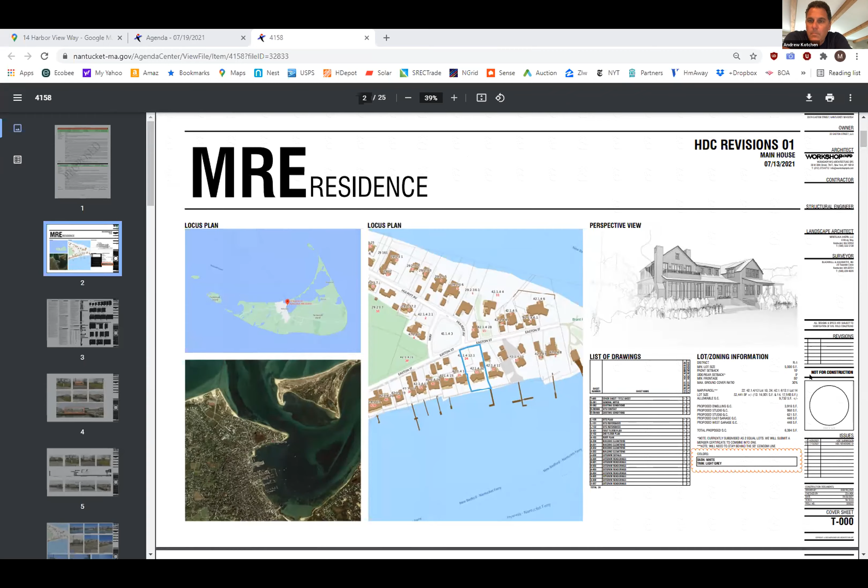So next on the agenda is 22-24 Easton Street, main house. Oh, I've got to bring that up. I'll share my screen. Mickey, I want to make sure you have the most up to date version, because it's been quite a while since this has been heard. Yes, this looks right. Yeah, it's definitely different than the last time we saw it. It's much different. Yes. Yep.

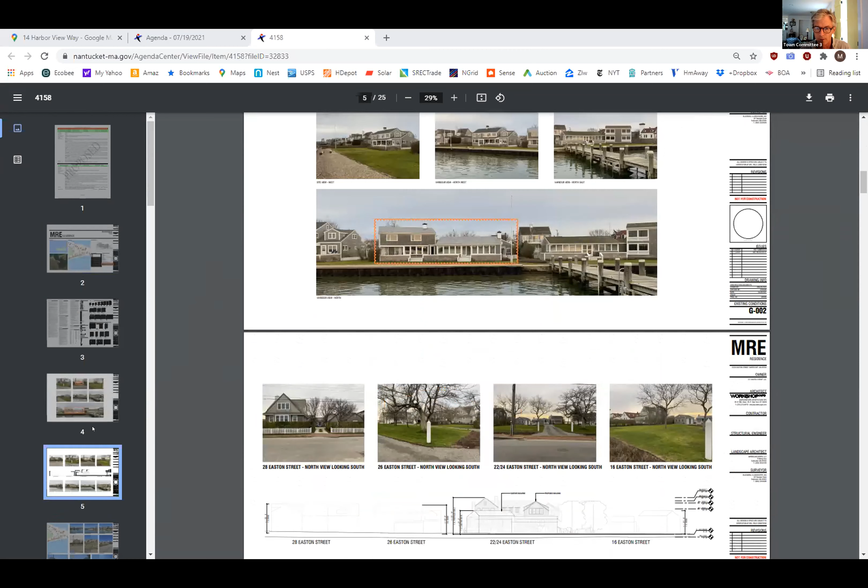All right, I'm going to go down to... I don't know how HSAB works, whether or not you want me to say anything, or do I just sit here and listen? Well, it's pretty informal, so if you have something you want to introduce or talk about, please go ahead. Okay, great, I'll be quick, I won't take up too much time.

Last time, HSAB had quite a few comments on this, and so did the HDC. I tried to take all the comments to heart. We've made pretty extensive revisions, starting with the site plan. Whereas before I had both garage structures butted right up against Easton Street, it was suggested that I stagger those to loosen up the street edge rather than maintain a full vertical wall, even though they are one story and at grade, since they don't need to be raised within the floodplain.

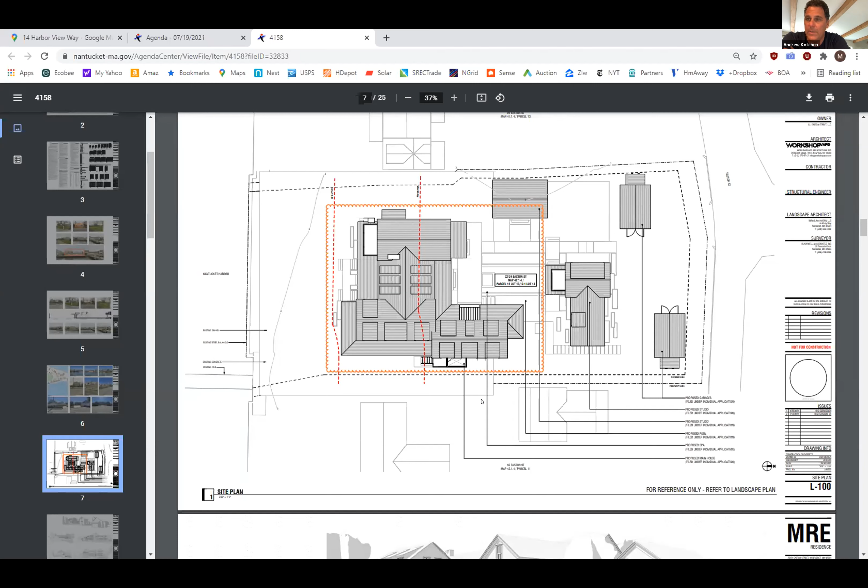Additionally, HDC and HSAB both really encouraged and suggested that the front door be visible from the street. So now the guest house structure located on the north side of the site has been slid down to the east, so that the curb cut will allow you to see the front door of the house from Easton Street. You'll see in the back of this packet quite a few renderings that I included.

Additionally, I broke what was a U-shaped structure before and made it more of an L-shaped structure, and now the studio is located on the western side of the site, disengaged from the main house. The HDC suggested I actually, believe it or not, add more glass and make the main mass of the house taller. So that's what I did on the south side of the project.

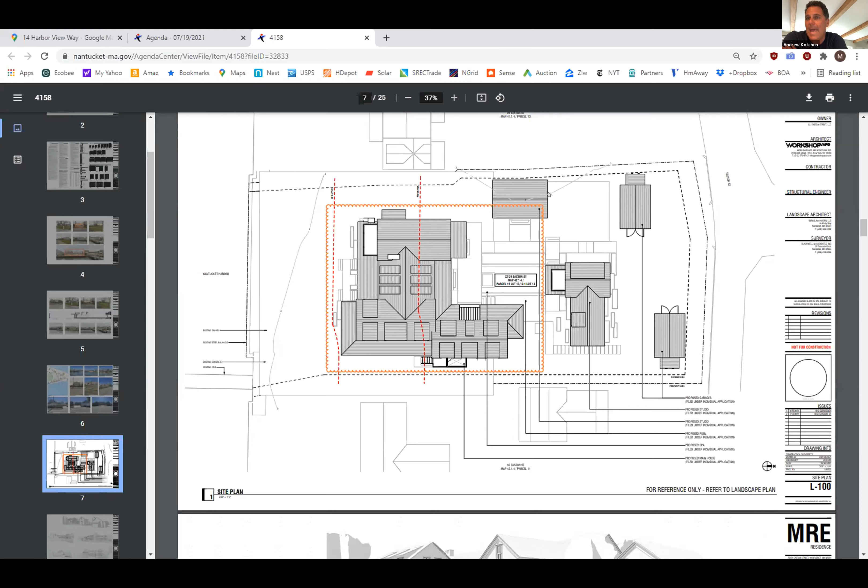I've adjusted a bunch of the dormers, added quite a few covered porches based on looking at some historical precedent from the area, and tried to create a home that is more interesting than a lot of the existing homes along Easton Street from the water.

I've spent a bit of time studying them, and I feel like this house has some nice additive massing components to it. It is varied. I also completely changed the trim detailing on it.

It was suggested that the house before was too plain. I've included some images in the back of this presentation of the trim structure where the larger overhangs, a bit more of almost a crown molding piece on the eaves and fascias that wrap around, a little more ornate on the head casings of the windows.

And I feel like it's a better house now than it was before. So it is now breaking the 30-foot ridge height plane.

So I will need to get that variance within the floodplain. But again, I was encouraged to do that to create a house that had a little more of a vertical presence on the main mass. But the secondary mass and the middle mass are below the 30 feet. So I'll leave it at that.

Oh, and I had before had black sash windows, and HDC said no way to that. So now it is, I believe it's gray. They are gray sash windows with a lighter gray trim.

All right, thanks, Andrew. I'm gonna, I've looked at this ahead of time and I've got some thoughts. And Andrew, I'm gonna apologize ahead of time. You're not gonna like this, but it's fine. Here we go.

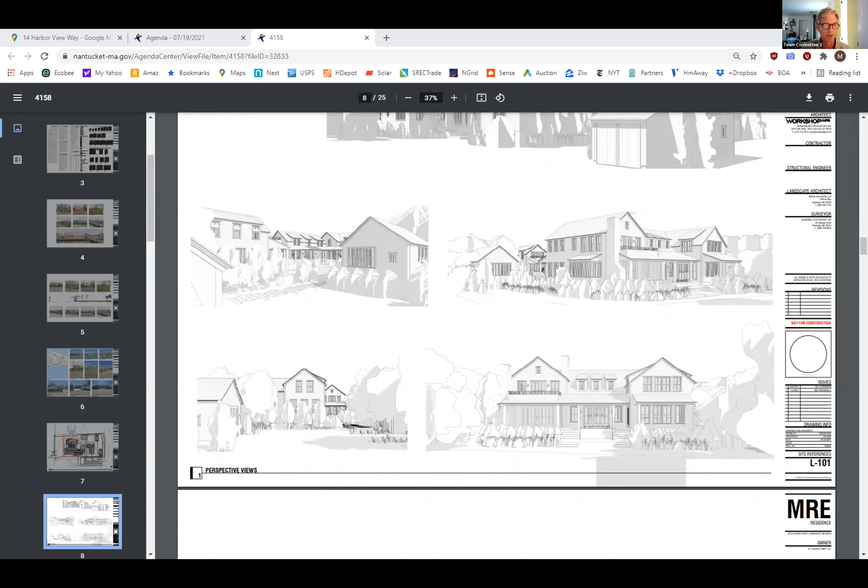Some of the details, the doors are oversized at 7 feet 6 inches tall, detracting from the scale of the building. And the four light design is confusing next to the 2/2 windows. Doors should look like doors and be of a more traditional size and pane proportions, such as 7 feet high with 12 or 15 lights.

I'm going to scroll down to some elevations. Okay, can you all see those elevations that we're looking at now? Yes, thanks, Mickey. Got it.

Okay, so the very visible chimney mass, and I'm referring to the one off of the, well, I guess it's on the west of the building, is in an incredibly awkward location. The east elevation of stepped parallel boxes reads as a monotonous 2-story wall with little character. The independent ridge of the stepped portion is too disconnected to count as additive massing and feels like its own building.

The horizontal boards on the outdoor shower and porch skirt are not traditional. They should be vertical or paneled lattice. The second floor deck railing should be more traditional rather than stacked horizontal rails.

The south-facing screened porch panels sit on the floor, confusing the scale of that section of the porch. They should sit on a traditional porch railing.

And Andrew, I think I would just suggest that you look, for my taste, for Brant Point, at other examples in the area. And I know, Sandanwede, it's a very old building. It's very classic. It's very charming looking building. And you probably are familiar with the building called Driftwood that used to be in this location. Another, very pleasing, attractive building.

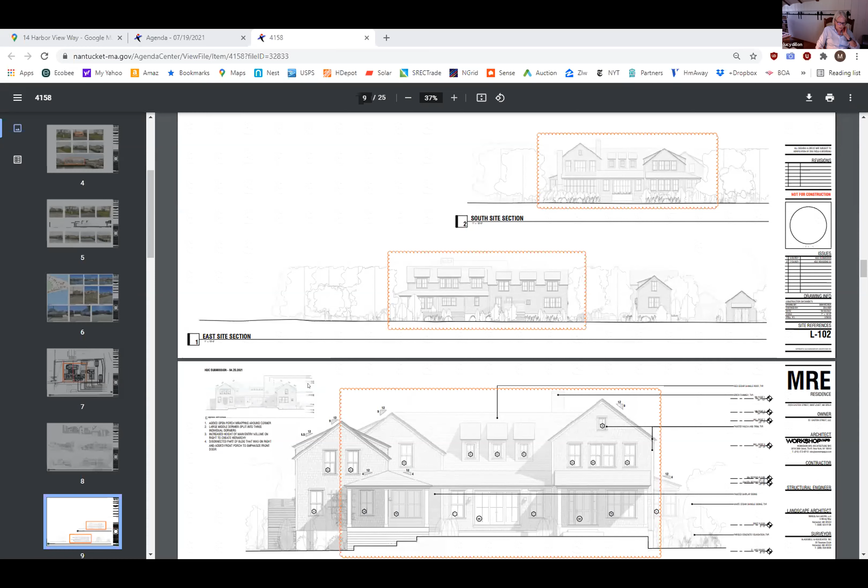Mickey, I agree with your comments. And Andrew, I realize that having to elevate new structures in the flood plain is an added challenge, and because they're going to be elevated, all these details are a lot more noticeable. I completely agree with Mickey about the large chimney on the west or east side, whatever, both chimneys. Were they to be regular brick, or parged, or painted? They're regular brick. Okay, and then you said something about the two different color grays. If those could be specified, that'd be great. They're on there somewhere, on the cover I think. I do know of an example of a neighbor of mine who said it was gray, and I think there was a drop of black paint put in the can, so to speak.

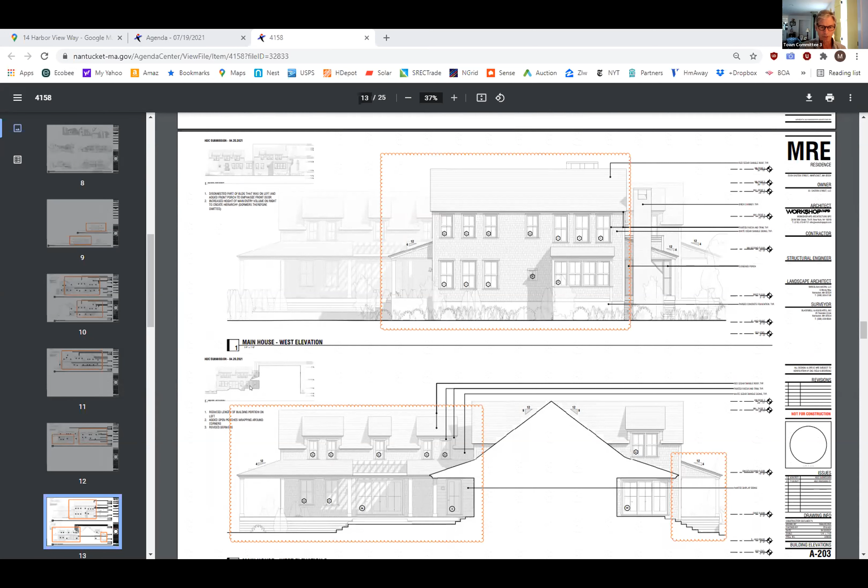Thank you. Okay, thanks, Lucy. Jason or Angus? Jason, I'll go.

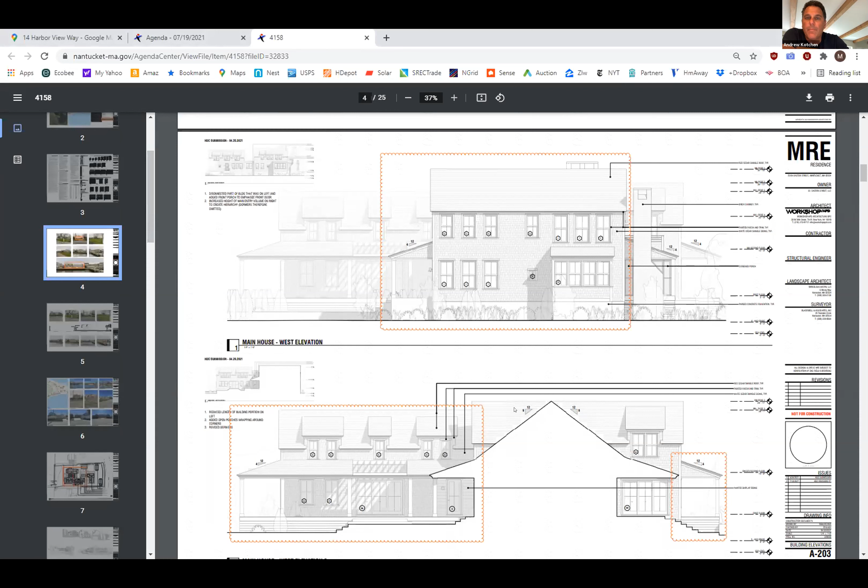This might sound confusing, but because I wasn't on this the first time, this is replacing a house. You've shown me the house that it's replacing, correct? We haven't shown the house it's replacing, unless you look at the images, right at the beginning. I just want to make sure I'm clear. Yes, it's included in the images. Okay, there, right, that's probably it.

Those two houses are basically mirror images of one another, the one on the left and the one on the right. The one that exists is, I don't remember the date off the top of my head, but it's fairly modern. It doesn't completely fit in with what you'd think of for Easton Street. I really feel like when these houses were designed and built, they were built to kind of blend in and almost disappear, and they do kind of disappear. They've become somewhat iconic though, just based on the way they look, the fact that they're mirror images.

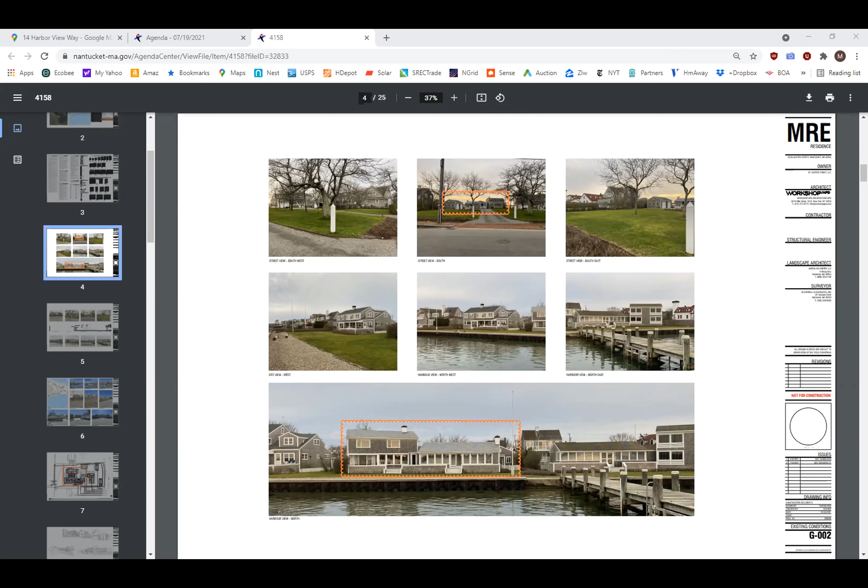But I feel like that was the point of the house that exists right now, to not take away from the rest of the neighborhood and the historic buildings on the street. So I kind of feel like something that replaces it needs to take that into account. While the house you've designed might be nice somewhere else, I don't think it's appropriate for this place. I agree with what Mickey and Lucy have said about the current design, but I feel like it's just completely overwhelming. I realize it has to come up because of the floodplain, but I just feel like it's not the right thing to be here. I don't have anything more to elaborate on, just more of my feeling about how a new structure should fit into Easton Street, particularly here and so close to Brant Point, because it's something everybody sees as they come and go.

Thanks, Jason. Angus? I agree with the comments said so far. This feels more like a complex than a house on Brant Point. I think it's a good suggestion to look at the more historic houses on Brant Point to get more of a cue about massing and details and so forth. There really isn't anything with this that to me is saying Nantucket, or specifically Brant Point. So again, I would look at the more traditional Brant Point examples of architecture here.

I could go into the specifics of everything, but it's more of a general feeling about the whole thing. I think programmatically you could have this capacity and make it feel like a compound, but it feels more like a commercial complex rather than there being a main house with auxiliary structures, or additive massing, making it feel that way. I'm disappointed to hear the HDC was asking for a rise in structure rather than a dropping of the substructures or additive massing. Anyway, those are pretty much my comments.

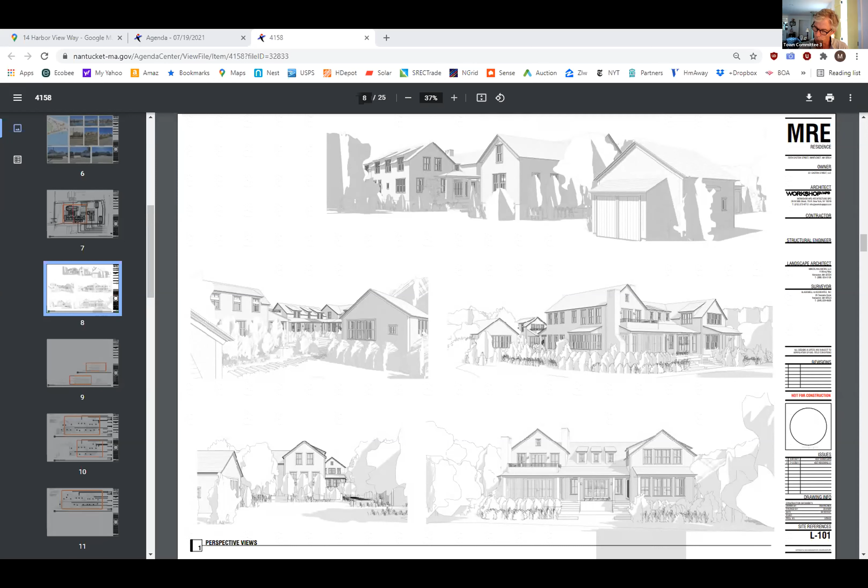All righty, next one is Jim Ikard. And I'm not seeing Matt McEachern here. This is at 1 Bloom Street. So I'm going to stop sharing. Oh, there's Matt, sorry.

Hi Matt, you're coming up next. Okay, thank you. I've got to share—I'm learning, I'm controlling this, so it's going to take some time to get up to speed. All right, do you see? No, you don't—share. Here we go. All right, you should see that on the screen by now. Yes.

All right, Matt, I've got some comments about this one. Is there anything you want to say ahead of time? Just that I think we made a lot of the changes that the board had requested.

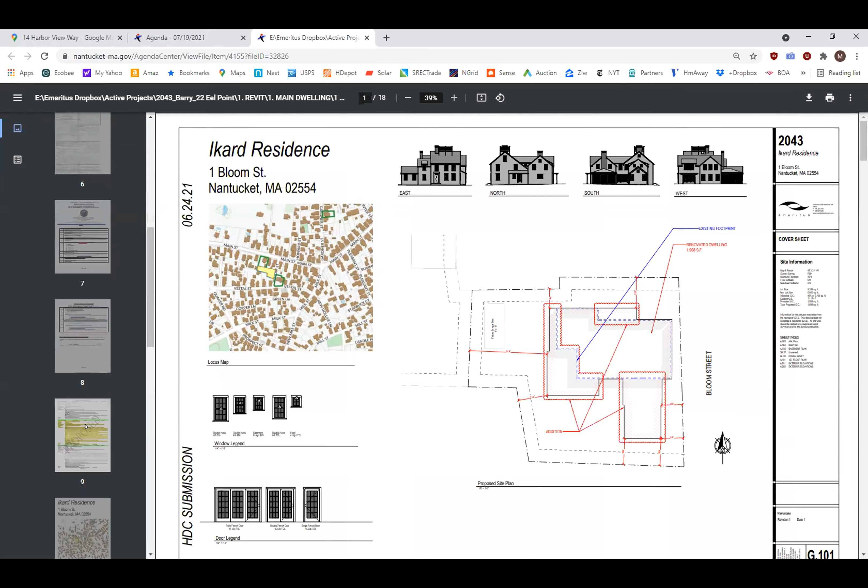We tried to simplify the street facade on the east. We adjusted the stepping back, so it's like telegraphing, lowering the plate height. These are mostly all on the east elevation. Start the video so you can actually hear—so yeah, it was mostly on the east elevation.

The HDC reviewed this as well after this committee did, and there were some changes that we made. You can kind of see the previous HDC submission on the east elevation—we had those four windows that were smaller on the first floor. There was just something about that we didn't really love.

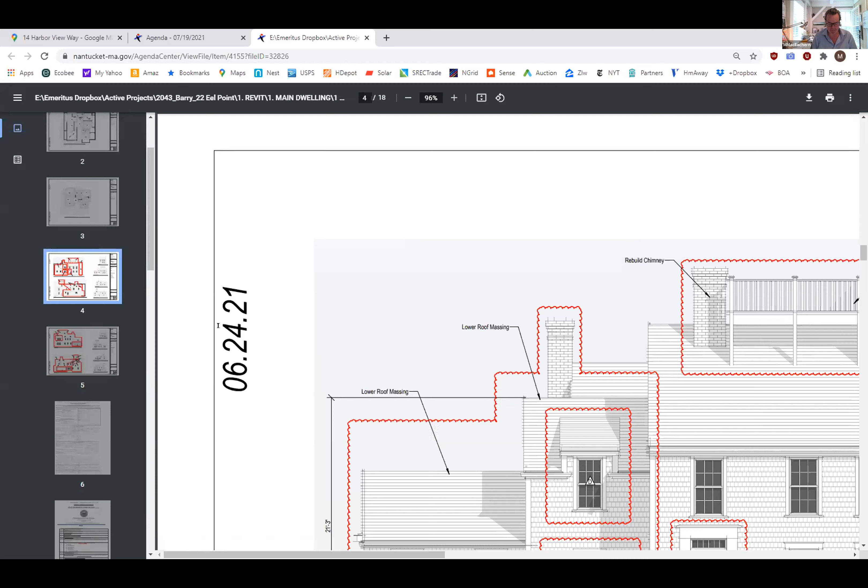So anyways, we dropped the plate height on the secondary additive mass to 1.5 stories, and just changed it to a single window, second floor and first, which I think really kind of cleans things up and makes it a little bit more subtle and understated.

We also dropped the plate height on the left side of the east elevation as well, so it just steps back a little bit, bit by bit. I think that it works well, I think it doesn't overpower the house, I think it's very simple.

The HDC also asked us if we could increase the size of the casing around the front door, based on some historical photos that we had presented as part of the application.

So I think the rest of the changes are in the back of the building, we're just trying to clean it up. The west elevation is the rear of the building. We played around with the width of the shed dormer so that there was a direct correlation to the windows below—French doors below to the dormer and windows above—and just tried to keep it fairly simple.

And then we did enclose that one-story screen porch—again, it's completely behind the one-story addition. So anyways, with that, I look forward to the comments from the board, Mr. Chair. Thank you. Hey, Matt.

All right, so looking at the east elevation where you started, under normal circumstances, in reality, this does look like an improvement to what you originally submitted. But I've got some prepared comments that I'm just going to read.

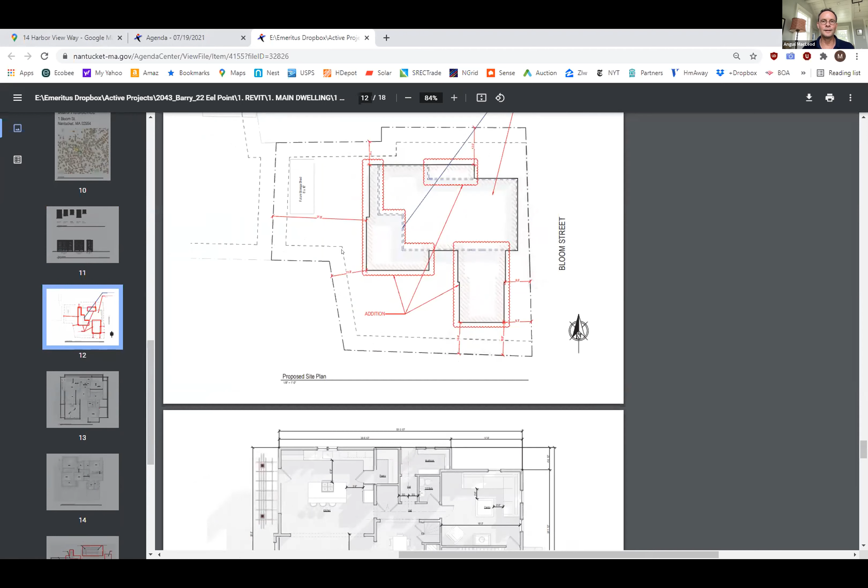And the side yard would optimally be the place for the recreation, the yard, so forth, that reinforces the existing historic structure that is unusual. Most of these houses have been tampered with to a degree that they're no longer really recognizable for what they once were. And this is an unusual house and circumstance.

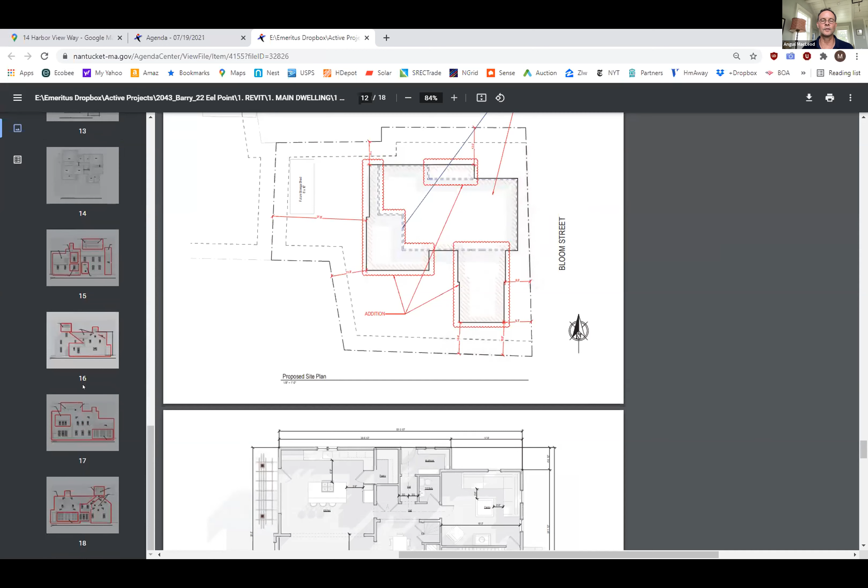I think that's why it's been on so many postcards, just the charm of the existing structure. No doubt houses have been altered and added onto over the years, but this is one that hasn't. So after 300 years, it would be great to have another 100 years of the house resembling what it once did.

And so I would strongly recommend taking the program and pushing it to the back rather than coming off the side. I appreciate the south addition getting brought back from the face—it was like a foot or two from the face before, which really created a wall, a monolith. Pushing it back helps, but what would really help is pushing it back beyond the original main mass.

I would get into more specifics, but I feel like that is really the biggest issue for me, is how much that changes something that's been the same for so long.

Thanks, Angus. Lucy? Yeah, I thought that last time we reviewed this, Matt, you agreed that you were going to come back with a drawing of the original floor plan because of the age of the house. Yeah, I thought we did that. If I didn't, I apologize, but I thought we did.

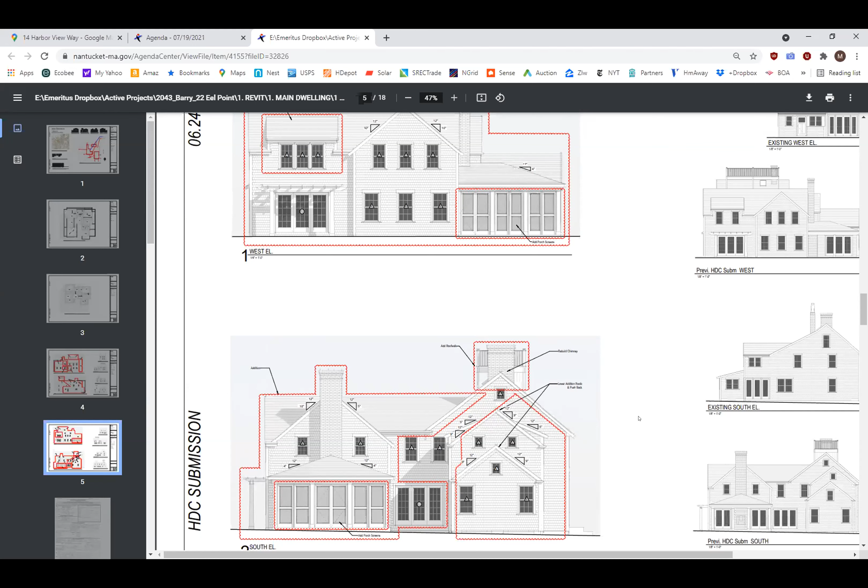There are a few other structures in the neighborhood that haven't remained completely untouched, but still speak to the time in which they were built, such as the cooperage on Vestal Street, not including the jail or the Maria Mitchell Association's Mitchell House. But I think this needs to be completely rethought, because there is a large yard in the back that this could all extend into, and it would be relatively invisible from Bloom Street. That's all I have to say.

Thanks, Jason. I think you're getting the message that we really want to respect the front main mass of this building and put all the additive massing to the rear. I think it's possible—there is yard space. But when I look at these elevations, the south elevation, the massing of the additions, even the one near the front and the one in back, nothing about them reads 1700s, or even 1800s. They just don't have that old classic feel you'd expect in a house of that age. They look like modern additions on an old house.

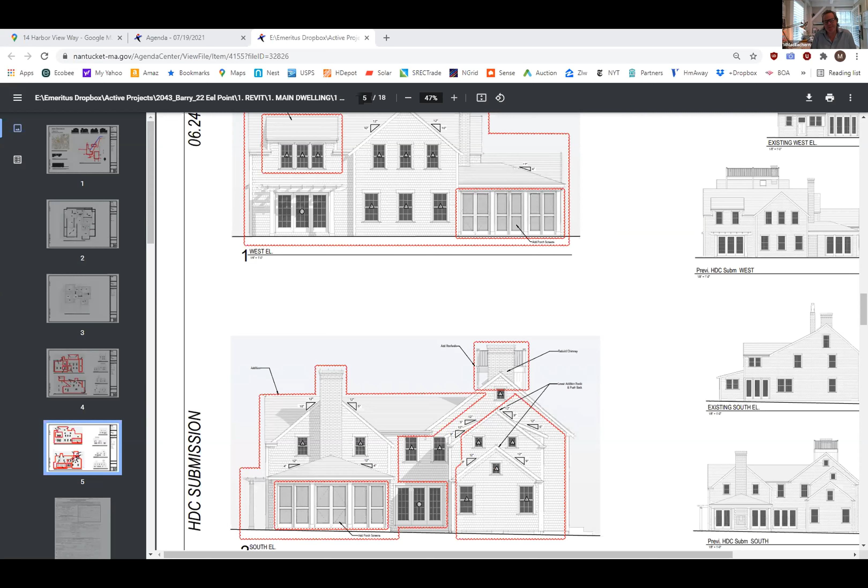So there is a school of thought with additions to historically significant structures that there should be some delineation, in the form of architectural detailing or style, showing where the original ends and the new begins. We could try that approach. But being very direct and honest, I understand the age of the house, and we're trying to keep a lot of the infrastructure in place. The stairs, unfortunately, are dangerous—very interesting architecturally, and if this were a museum they'd be roped off and you wouldn't be able to use them. But for the most part, we took the approach of trying not to alter the original portions of the structure, and then doing additions to it.

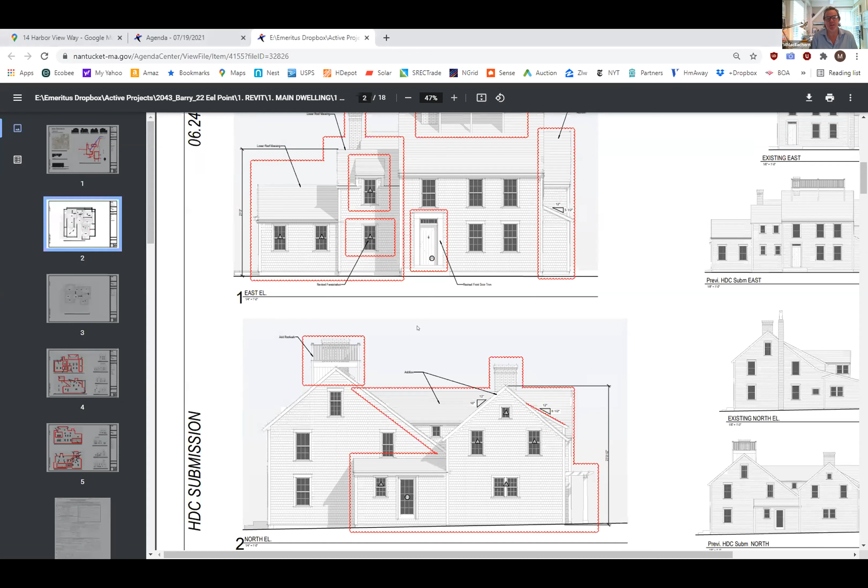This lot in particular is unique. Most structures in the core district are narrower, and the original primary mass of the structure, the historic portion, would sit within that frontage area, with no room to go side to side. In this instance, it's a wider lot, and there's some latitude to do an addition to the side. So that's what we were proposing.

But anyways, I'll certainly take all of your comments under advisement. We're going to be before the HDC hopefully tonight as well, and I know they'll read your comments beforehand, which will kind of set the tone. So thanks for your comments, and we'll see what the board has to say and take it from there.

But definitely get the message. Nikki, can I say one thing? Yep, go ahead, Jason. Matt, no one is asking for this to remain a museum, but with the amount of program you're proposing adding, the winder staircase doesn't need to be removed. You can put a different staircase in the back. That's all I have to say.

Thank you. Yeah, and it's an emotional thing to see an old 300-year-old house lose much of its defining character, and unfortunately for us, some of that defining character is inside, like this stairway. That's never coming back. Those stairways are part of the definition of an old house, and once you remove them, they're all gone. We just hate seeing that happen to these old houses. Well, I don't disagree.

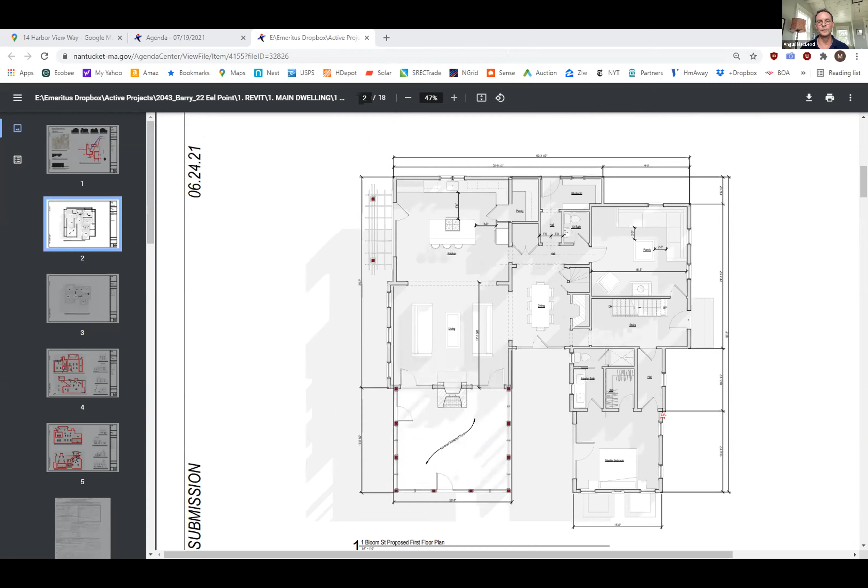Anybody else want to continue or move on? I guess one more, I'd like to move on. I'm sick to my stomach that this interior, which is priceless and precious and at the core of this national historic landmark and a significant, historically significant building, that was a choice. For a professional working in a national historic landmark such as Nantucket, there has to be a sensitivity and a responsibility to be the caretaker of these structures. It's up to us as professionals, I'm saying that as a preservation architect, you have to be firm with your clients about what is necessary to stay and how you can emphasize all the qualities that exist in these old houses, rather than changing the character so substantially.

Okay, enough said. Let's move on to Matt's next one, which is 37 Fair. Pull that up. One second. Screen share. All right. Still loading.

I'd be happy to hear, Matt. I have less to say about this one. Great, yep, that was a rough one. Sorry.

So basically what we've done here is the HDC had requested that we change the rear L cross gable to just follow the ridge line of the existing rear L, so just kind of simplified it. You can probably see it best on the north elevation. HDC also asked that we reduce the amount of fenestration on that first floor porch. So I think those are the major changes.

Okay, thanks, Matt. I'm going to again open this one up, and I think that that's an appropriate change. I like that ridge change. The thing that still bothers me a little bit about this is the bump up in the ridge.

I have a suggestion, and I don't normally like to get into the nitty design details because that's your job. But if you see this wing, if you see my arrow outlined here in red - Matt, if you were to push that to the south a couple of feet so that it's not prominent on this elevation but recessed, and then put a break in the roof line, because that'll naturally happen if you just leave the eave where it is - to me, that would feel better, because this elevation is more visible than the south elevation, just because it's more exposed. Even though the ridge will still bump up a little bit, I think it'll be less visible because it's in its own roof plane.

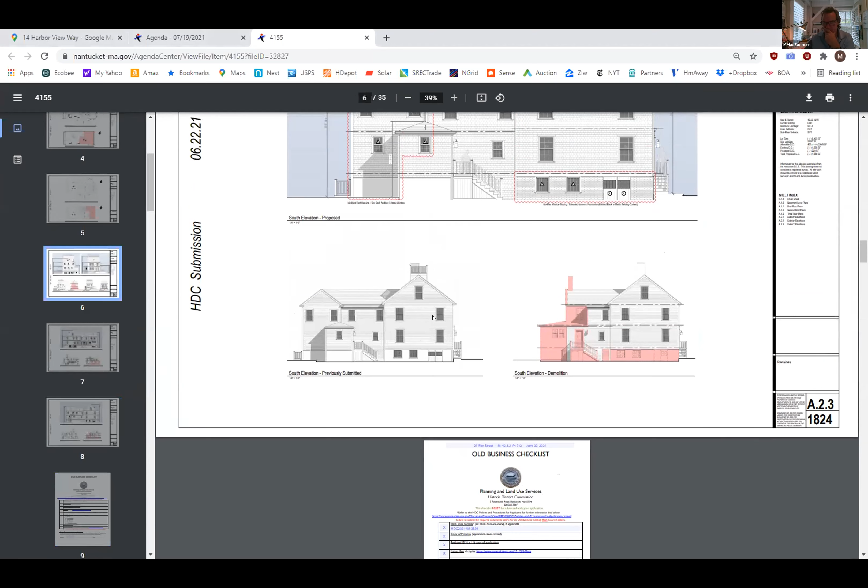So let's go to the south elevation, or the west, I guess. South - that won't change a whole lot, just different. And then the west is probably here. So you don't really see, can't see that original ridge behind, but so anyway, those were my only comments.

I also might still suggest that French door on the north, if I can find that - here we go - be broken up into a French door and side windows, because the side lights, it's just an expansive amount of French door rather than windows, which we prefer. So those are my comments. Anybody else? Angus, go ahead.

I agree that the parallel gable, as opposed to the reverse gable, is more successful on that north elevation. I think breaking it up makes sense, but maybe even better than what's proposed in this drawing is to keep it flush, a continuous gable that continues on back, changing the shed on the south elevation to facilitate that bump back. But ideally, this ridge wouldn't be any higher than the ridge it's getting added onto.

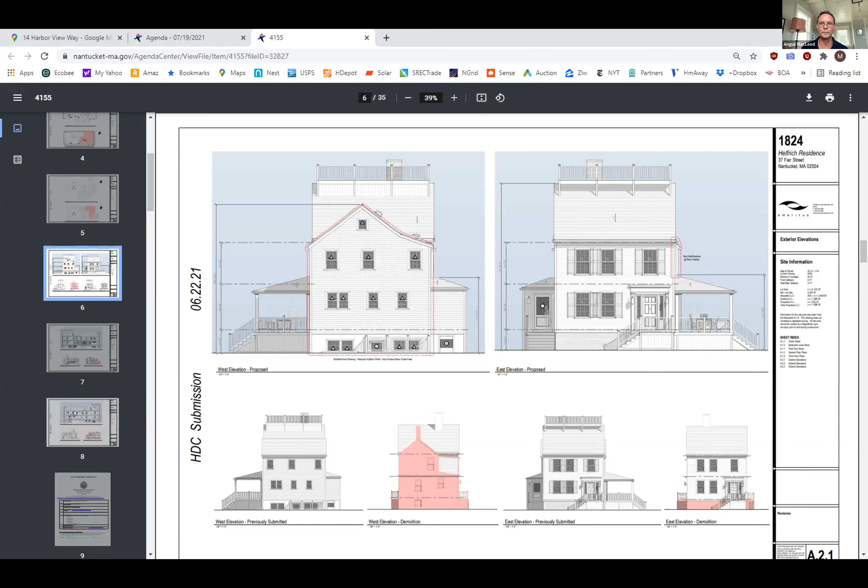Almost always it just continues dropping as you get further away from the main mass. But I definitely think this is a move in the right direction. It feels better than the original proposal.

Another suggestion for the porch French doors is to separate them, so if you needed a couple of French doors, there's some sort of separation between them. I'm trying to think, there's a large porch on Pine Street, not far from here, maybe on the other side of Darling, that has a couple of sets of French doors, but they're separate.

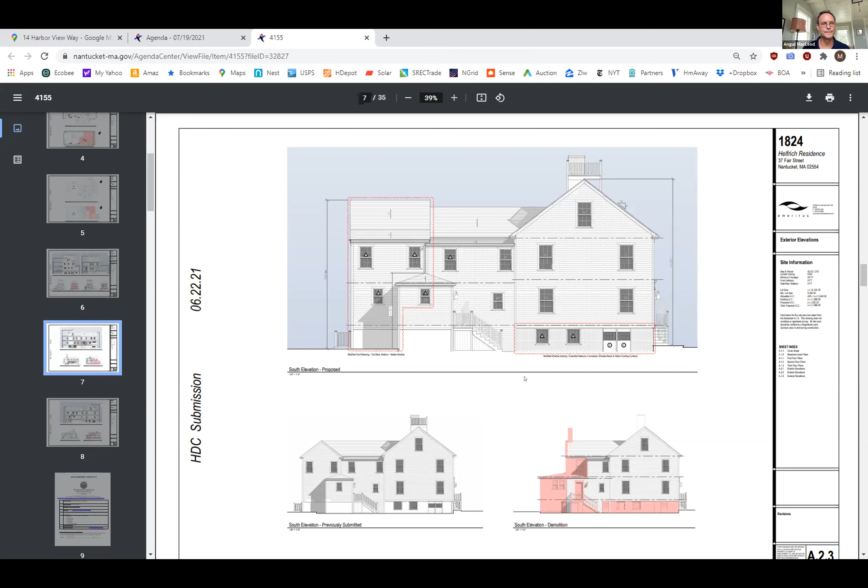So Angus, you're saying you're still not pleased that the ridge bumps up and would like to see that pulled down, because true, they almost always continue breaking down and down rather than going back up. So that would be a positive, to try to somehow get rid of that increase. Yeah, I don't think it's necessary.

Okay, Jason or Lucy? I agree, historically that would not pop up like that in the back, it's very odd. Yeah, I'm disappointed in that little back L, because that little back L is, I keep using this word today, but it is iconic in the way they did those additions, and the loss of the chimney. I'm not in favor of this, but one thing that definitely has to happen is that roofline has to come down, at least be even. I prefer it to be lower than that middle piece, but it definitely has to be even with that middle piece.

Lucy, did you want to add to that at all? No, you're muted, but it looked like a no. I agree with what's been said. Okay, thank you. Alright, I think we can move on from that one. Thanks, Pat. And you're still on, I guess. Yep.

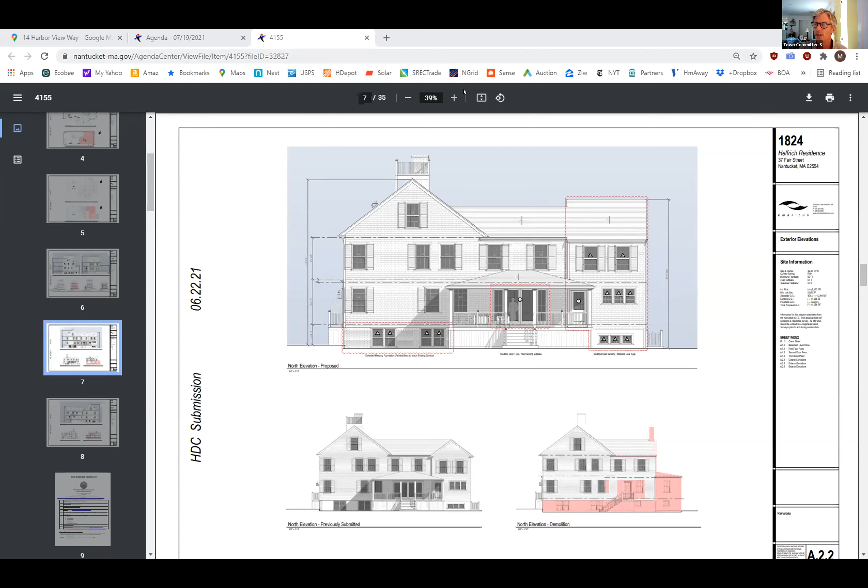So, just want to say that I really enjoy our time together. I bet you do. I wish it could be more. No, sorry, but no, that's okay. I got it, that stare, I know that stare. I'm telling you, we really debated over it. I know I'm not going to convince anybody of anything, but... no, you're not, nope. Well, in a situation like that, I mean this sincerely.

I'm not interested in, I don't like demoing historic things, I really don't, despite what you might think. But in a situation like that, can a preservation trust buy the property? Because no matter how old it is, it's still a house that's on the market, someone buys it, even with the understanding that it's a historic structure, staying within the confines. I just wonder if there are venues where you could try to get the house purchased by a land bank type endowment.

Nobody's got the money for it. Yeah, Matt, that conversation comes up a lot. You know, who's going to buy a bunch of old houses? The NHA doesn't even want the properties because of the maintenance. People have got to understand that they are buying something that is pretty much unique, that won't be available in the future, and they should take pride in that. If they don't want to live in an old house, go buy a house on Cisco or somewhere else.

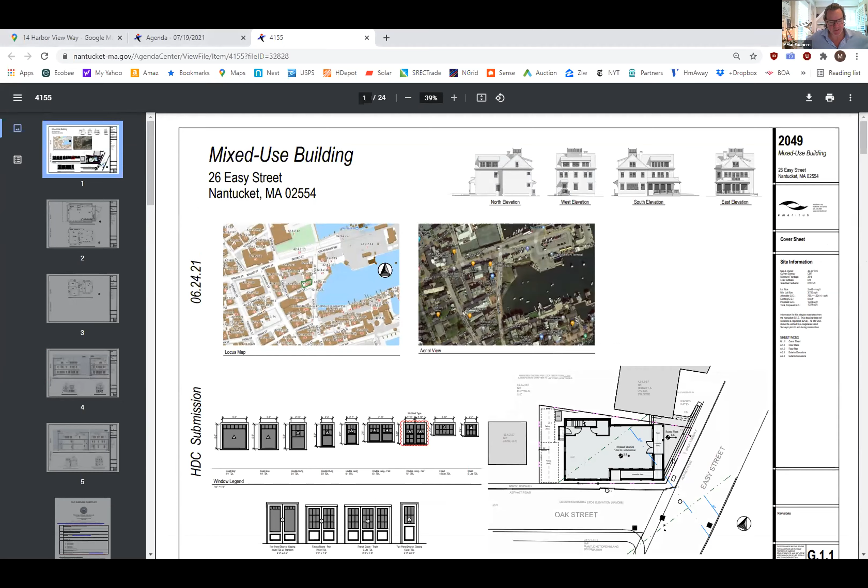The reason being is there's a 1 in 20 ramp at 26 Easy Street that allows you to go up to an elevated area in front of the building, so it allows for flush thresholds. If we connected the two, we'd essentially be elevating a secondary public space, if you will, connecting the two structures. You can see the steps in the elevations and the site plan.

In general, what we tried to do is just really simplify it based on the comments from the board. The one significant change, which I don't know if anyone's caught this, is that the building is shown as being brick. And that is purely a function of coastal resiliency and durable building material on the coast.

So with that, I look forward to the comments from the board, we can go from there. Oh, I'm glad you mentioned that, I did not notice that - maybe I should have shut my mouth. A brick building downtown, that's an interesting thing I got to think more about.

So Matt, I have noticed that you've made some of these detailed changes, but I read through the HDC's minutes and everybody on the HDC said this building is too tall and too complex. And I don't see any changes in that regard in the massing of this building. So, I'll just go on again.

Sorry. This design is still too large and too complex for this location. The historical waterfront typically had simpler utilitarian buildings. This design is very similar to the one next door on Easy Street, which would create a new and inappropriate dominant style in that area. This building should contrast with that one to show that this is not the new norm on this street. Instead of both masses being at the same height, there should be a change.